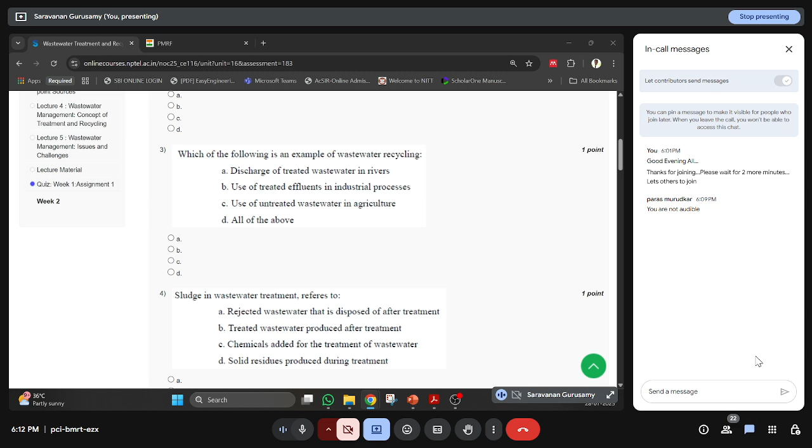Here you have a tab called Q&A, so if you go to Q&A, you will be directed to Google Groups. There also you can post some queries, and I will answer every 2 days once, so you can use that platform too.

Okay, so that's all about NPTEL and this course.

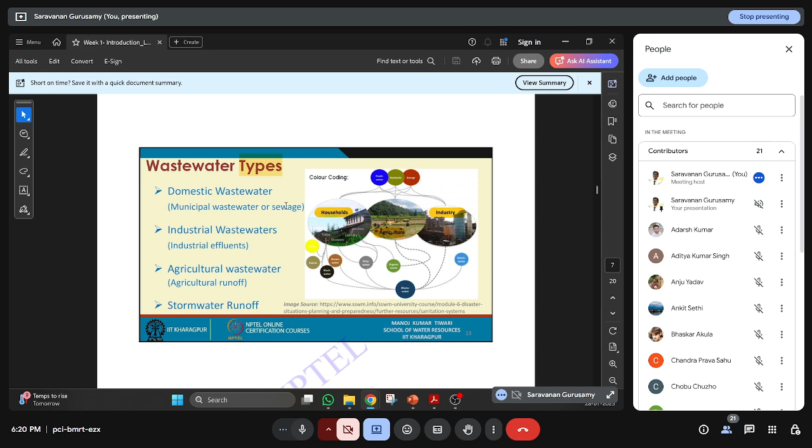So coming to the types, four major classifications, and the last one is runoff, which will not be wastewater. The other three are domestic wastewater, industrial wastewater, and agricultural wastewater. Domestic's other names are municipal or sewage - whatever sewers we have in front of our homes or institutes, the sewer lines in the roads, are called domestic wastewater sewers. Industry we call effluents, and agriculture we call runoff.

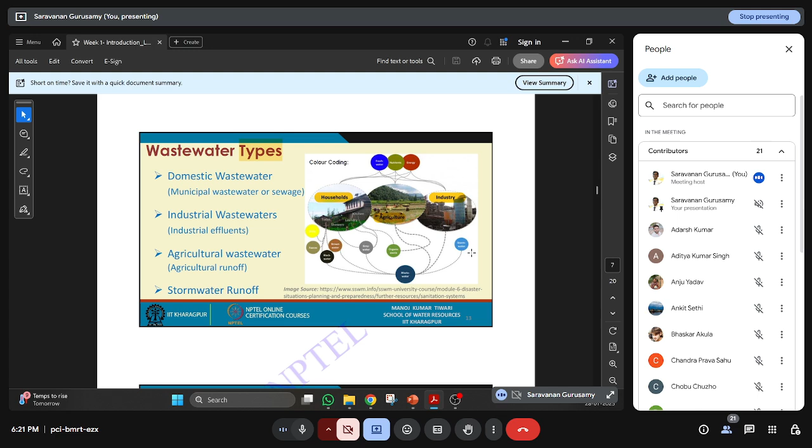This is the major classification, and we have a color code for each. Agriculture will have lots of organic load and nutrients coming out, so that's called green water. Storm runoff will be majorly pure water, so that's called light blue color code. Households will have lots of color codes that we are going to see here - if you think less pollutant to more pollutant, the color changes from light gray, heavy gray, brown water, to yellow water.

In the toilet, urine is called yellow water, and feces plus the toilet flush water are combinedly called brown water. So brown plus yellow will give you black water. This is totally the black water that comes out of the toilet, which will mostly have organic pollutant in it.

Other household contents like shower and bathroom taps won't have much pollutant, only soap washed with lots of water, so that is light gray water. Dishwasher and kitchen taps have some more organics, and washing machine wastewater, the flush water, also has some organics - that is called heavy gray water. So light gray water plus heavy gray water will give you the total gray water, while brown plus yellow commonly call black water.

That's a less polluted load. Okay, so this is the overview of color coding of our wastewater system.

Industry, if you see, all industry will use water in at least one process, so they will produce wastewater. And agricultural is another, third sector. First sector is domestic, second sector is industry, third sector is agricultural.

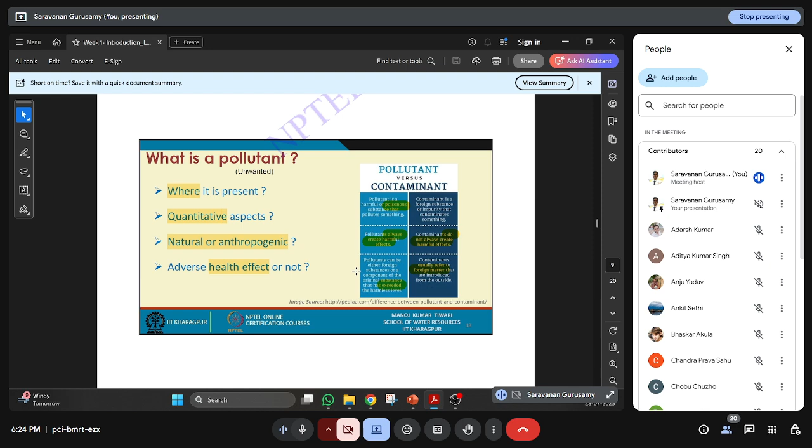So pollutants always create harmful effects. Contaminants do not always create harmful effects. The pollutants are contaminants that have exceeded the concentration. So that's the difference between pollution and contaminants.

So another classification for wastewater is wastewater sources: point source and non-point source. If you know where the wastewater is coming from, then it is a point source. If you don't know where the wastewater is coming from, then it is called a non-point source. So I have different sewer lines discharging wastewater into my lake or pond, then I know which pipe is discharging. So that is a point source.

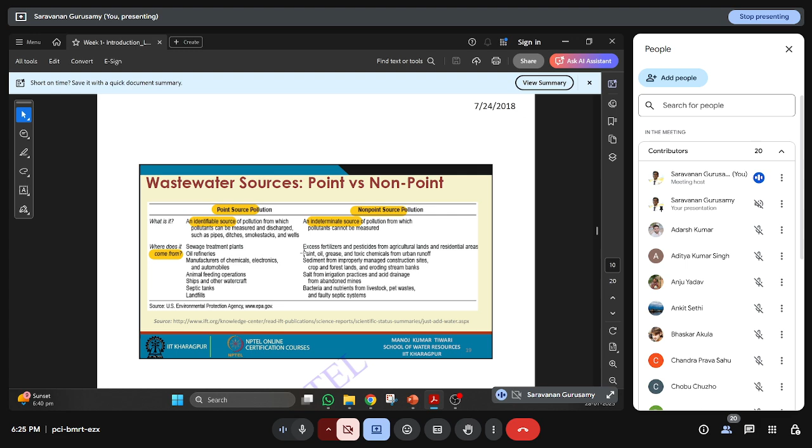So identifiable sources of pollution, like any sewer system, oil refineries, animal feeding operations, ship - because I know which ship is discharging - and septic tanks, landfills. So I can easily identify. What are the sources that are not identifiable? Like any excess fertilizer coming out of the agricultural field - I can't find which field is contributing to my wastewater. And like bacteria and nutrients in livestock, or any leak in the sewer lines, we can't find where it is. So those are all non-point sources of pollutants.

So if you see the difference between point source and non-point source, you can control the point source because you know where it is coming from. But non-point source is a diffuse source - it's coming from many diffuse sources. You can't control it easily. So you have easy control over point sources, it's a cumulative effect for non-point. Point sources can be easily monitored, but non-point sources are difficult to monitor.

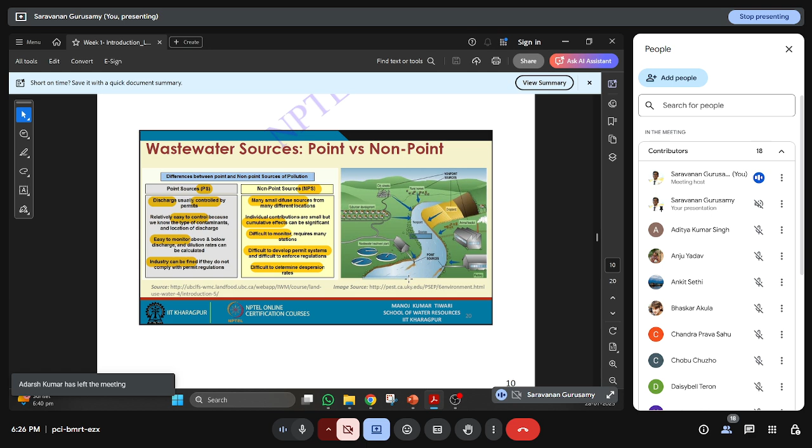And you can regulate some standards for this point source. If any industry is polluting, you can find the industry and have a regulation for that. But if you have a non-point source, you can't find which industry is contributing, so you can't give a regulation for that. And you can't find the dispersion rates. If it is a point source, you know how it is going to disperse - I am discharging my wastewater here, so I know how much is going to come here, I can model it through modeling of wastewater. But if it is non-point source, I don't know where it is coming from, so I can't model how much is going to come here.

So that is the problem with the dispersion. Dispersion is how much it is going to reduce or increase along the course of water.

If you see the diagram, a cropland is a non-point source. We don't know which agricultural field is contributing. Like that, if you see the wastewater treatment plant, I know it is going to discharge here. You can easily find it with the color change itself. So that's a point source. And a factory, that is also a point source.

Sir, for the non-point source, how can we find the capacity of STP point? Can we find out if there is any method to find out what amount of capacity is required by non-point sources? No, you are not talking about the STPs that are collecting the wastewater. We are talking about the STP effluent that is discharged into the river or lake.

Non-point sources are these open drains. How can we define that? That would be non-point sources. From the STP, the disposal point will be a single pipeline, but the sewer which is running in an open drain, that would be a non-point source. The drain that is discharging into the pond, that is a non-point source. But the treated effluent coming from the STP is a point source.

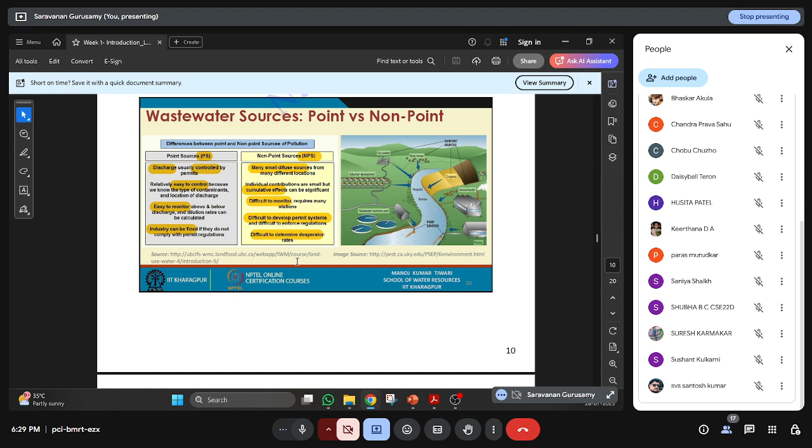So we are treating only the sewage that is collected in the drains. We are not treating the storm water that is collected. This is the difference. So drain will be a common term, but sewer lines are different - drains and sewer lines. Thank you for the question.

So you can see the examples of point source. You can identify with the color code itself. An industry is discharging here, so I can find the industry because it is discharging. Here I can find which pipe is discharging what nutrient, or I can easily collect here and measure. You are exceeding my standard, you should not discharge. So that is the standard for each industry.

In Tamil Nadu, we are adopting zero liquid discharge. No industry should discharge any liquid out of their premises. So if you are using 100 liters per day, you should not have even 1 ml going out of the industry. You have to treat on your own, only to the prescribed standard or zero liquid discharge. So they have to reuse it on their own.

We are only supplying the fresh water, we are not taking out the effluent to treat. So all industries are now following ZLD in Tamil Nadu, and many other states are following the zero liquid discharge system too. We are not allowing them to discharge even 1 ml out of the industry. So that kind of system is also there.

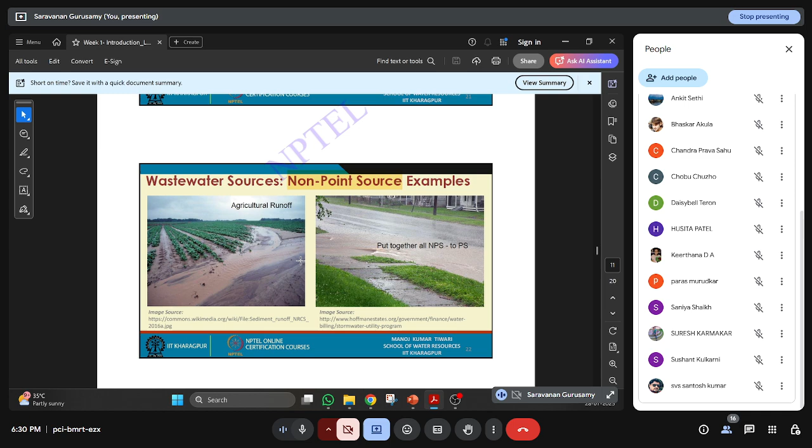If you see a non-point source, as mentioned, this is our drain, rainwater running out of the drains - that is considered a non-point source. Agricultural runoff is also considered a non-point source. If you put together all the non-point sources and collect them in a drain discharging into a single point, then we can convert the non-point source into a point source. That is one criteria you can follow. So that is the difference between a point source and a non-point source.

So why do we need to manage this wastewater and why do we need to treat it? Because if you discharge sewage or wastewater directly into a pond, river, or any water system, it will have severe consequences. First, human health will get affected. Second, the environment will get affected. Third, the economy will get affected. These are the three major reasons we have to treat and manage our wastewater.

First, health effects - what will it cause? If you directly discharge your wastewater, water-related diseases may originate, like cholera, dengue, diarrhea - these are all waterborne diseases.

So that will again increase in your area, so you have to treat it.

In 2012, statistics show around 8.5 lakh deaths happened in middle and low income countries due to contaminated drinking water, because we get drinking water from river sources. If you pollute the river, your drinking water is contaminated, and you will get waterborne diseases.

If you see the risk, unimproved sanitation will have high risk. If you have community sanitation or sewer connection, you will have low risk. That is the risk category you can use to categorize wastewater treatment management systems, and this is about health.

What about the environment? If you discharge untreated wastewater, the receiving body, that is a river or any lake, will have a huge amount of its water resources already contaminated. If you think about the statistics in India, most rivers like Ganga and Yamuna, most of our perennial rivers are already polluted with industrial discharges.

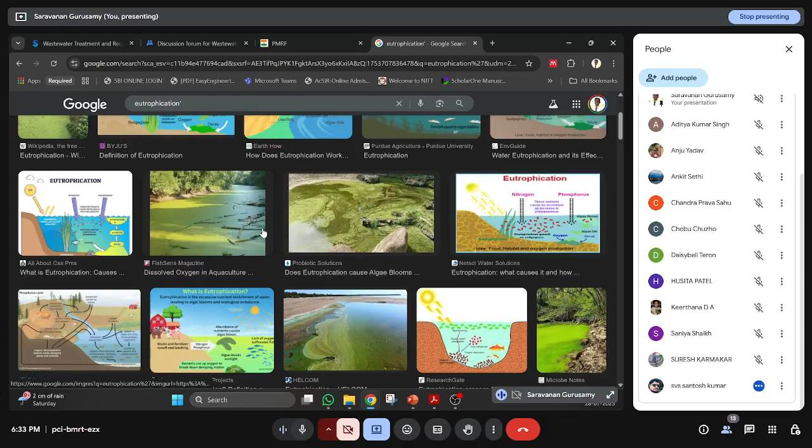I can show you images for eutrophication. If you see some of the figures, you can understand. Yeah, this is the kind of thing. How can we treat such a concept?

The only thing is you can't treat it, you have to stop the discharge, and naturally it has to regain itself. There is a process called natural regeneration of water bodies, but that will take time.

If it is a continuous flow system like a river, that can easily replenish. But these are all stagnant water bodies like a pond or a lake, so that will take a lot of time to replenish. So, is there any process to rectify these things?

If you have a collection system, and you are having sewage that contains nitrogen, phosphorus, potash, you can treat it. But if you have a pond that is containing wastewater, you have to first cut off the source, and then it will automatically replenish in a year's rainfall. It will easily replenish. If you don't have the source, algae will die because it's not having any nutrient.

So there will be no growth of algae, and it will easily die. So you can easily get the oxygen back. That's it. So the main problem is you should not discharge the wastewater into the source, you have to treat the wastewater.

So the third one is economic impact. The first one we discussed was the health impact. The second one is about the ecosystem. The third one is about the economic impact.

All the tourism or major parts of our economy are based on water bodies. We have fisheries, we have tourism, we have a transport system based on ships and so on. All of this will get affected if the water is polluted, so that is an obstacle to economic development.

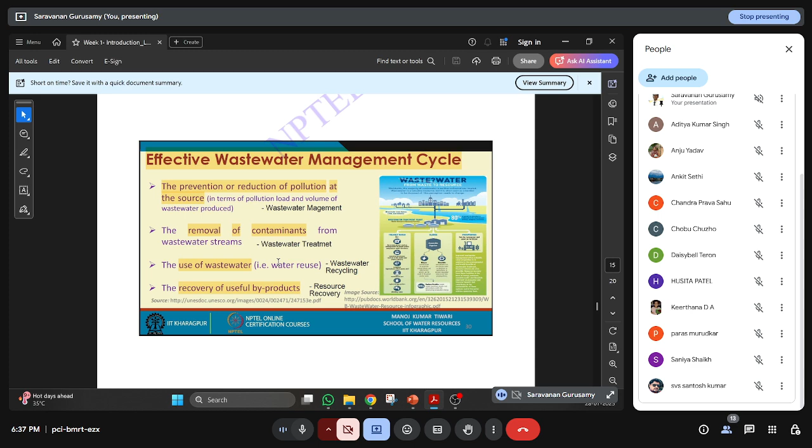If you think about it from a recycling perspective, wastewater contains a water source, a nutrient source, and an energy content, because you can generate energy from wastewater by anaerobic digestion. You can get methane, generate biogas, or do incineration. Organic matter is present there too.

If you discharge wastewater into wetlands - you know about wetlands, I guess - wetlands are natural ecosystems that can treat wastewater. You can simply discharge wastewater into the wetlands, so the carbon and nitrogen will be taken care of by the plants present there. It can treat the water and discharge pure water into the water bodies.

So lots of wetlands are there. There is a Wetland Conservation Act in India, a World Wetland Day, and some Ramsar sites in India. Recently, about 6 months back, two more wetlands were introduced as Ramsar sites in Tamil Nadu. You can search for Ramsar sites on Google and find lots of information about that.

So you can see the Ramsar convention, and you can see how many wetlands are there in India and their locations. That will give you a broad idea on how to approach this.

These are all wetlands. So you can see - if you discharge wastewater, the roots and plants can absorb the carbon and nitrogen present in the wastewater, and it will give you fresh water. That is about organic matter extraction, and other byproducts we can also get.

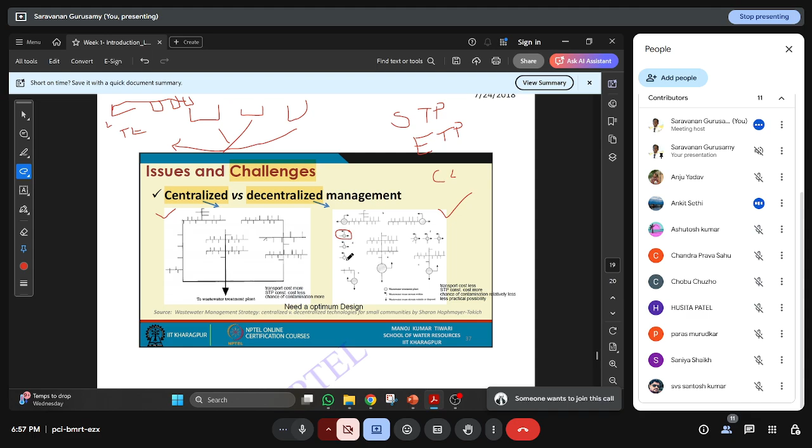When we talk about STP versus ETP - STP is sewage treatment plant - we usually say the reuse of STP can be used for horticulture purpose or toilet flushing. So what I'm talking about is the reuse of the treated water, the water which is used for flushing purpose. But in case of ETPs, they say...

Sir, your voice is not clear. Only to me or to everyone? Sir, I couldn't get you. Not clear, yeah sir, please. Can you repeat please? Yeah sure, I'm audible now. Yeah please.

I was saying that the output of STP can be used for horticulture purpose or toilet flushing, right? But some ETPs use soaps and detergents for treating - and I got your question. Maybe you're asking how we can reuse the treated effluent from industries.

As far as Tamil Nadu is concerned, we have zero liquid discharge. So all industries, after any treatment technology, use multiple effect evaporators. I think we have this in the course. That will evaporate the treated effluent so that we get only the salt or the residue - all the water will be evaporated.

That's the technology we use - we can't rely on discharge, and it also has energy production because the steam we produce can be used for energy production, and the recovered salt - because any industry will have only one pollutant, unlike sewage. So industries have only one type of pollutant that can be easily recovered and used in their own system. Many industries use multiple effect evaporators, MEEs. So they're not discharging anywhere, nor are they reusing it elsewhere.

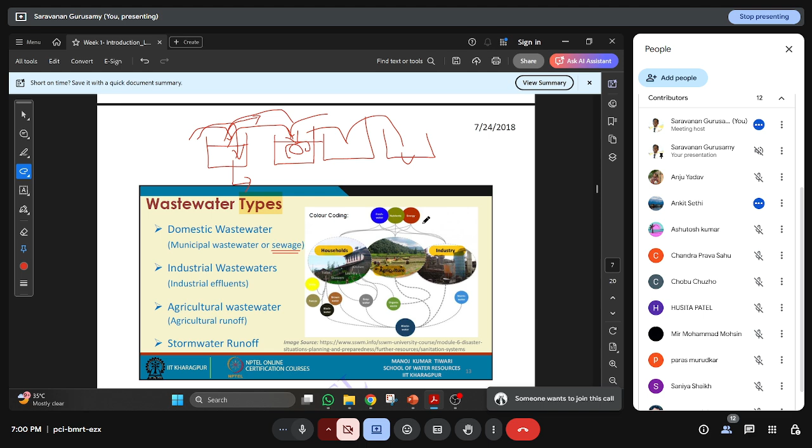Any mining industry or metal smelting industry has only one type of metal that can be recovered and used for their product. Okay thanks - that cannot be reused until it is not organic, you can't discharge it anywhere. So that's the broad idea we can take. Okay, thank you.

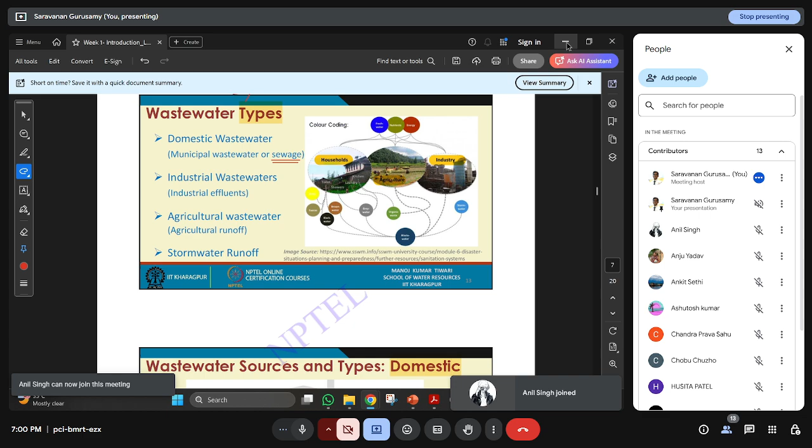So first question: what is wastewater recycling? A) Treating wastewater for removal of contaminants, B) Recovering beneficial nutrients or metals from wastewater, C) Reclaiming water from wastewater and putting it to beneficial reuse, D) All the above. You can post ABCD in the chat box. Treating wastewater for removal of contaminant is not recycling, right? I'm not asking about wastewater treatment, I'm asking about wastewater recycling. So how would it be? Recovering beneficial nutrients or metals, reclaiming water from wastewater and putting it to beneficial reuse - that may be correct, I guess, right?

How come it will be B? Because recovering beneficial nutrients is treatment technology only, it's not recycling. Recycling means we have to think about the 99% water, the recovered water - that is reclaiming water from wastewater, that is the 99% of water. Let me take the pen.

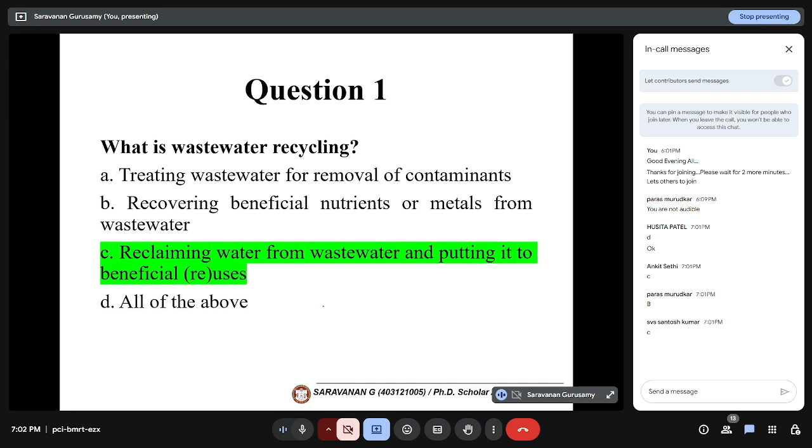So reclaiming wastewater and putting it to beneficial reuse is called wastewater recycling. The question may be tricky, but simply if you read it, you will get the answer. Wastewater recycling is reusing treated water, reclaimed water, for beneficiary purposes.

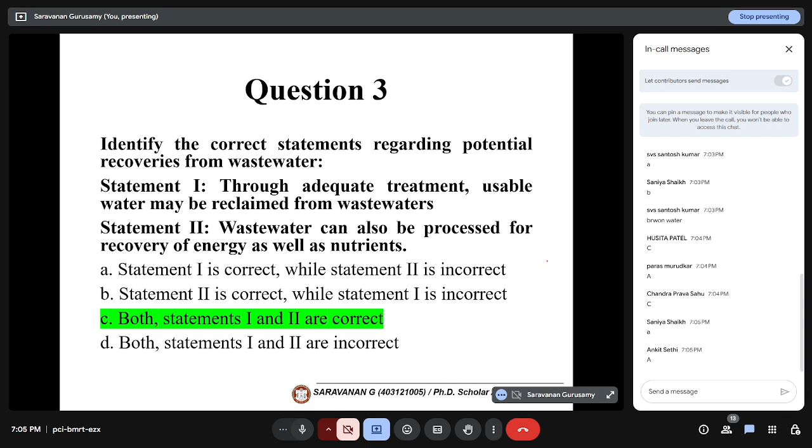Why are you thinking the second statement is not correct? Think here - in a recycling perspective, resources can be recovered. Water, nutrient, energy, organic matter, or anything can be recovered as a byproduct. So the second statement is correct - wastewater can be processed to recover energy as well as nutrient. You got it? Okay, please correct it.

So fourth question - hope you are coming with me, or can I go some more slow? Is it fine? We have 30 questions in this.

If you think about a non-point pollution source - what is it? A source with negligible amount of pollution, a set of several small sources from many different locations, a source of pollution that was there in the past but no longer exists, or a hidden source of pollution which cannot be identified. I think non-point source will have only one keyword - non-identifiable. Option D may be correct.

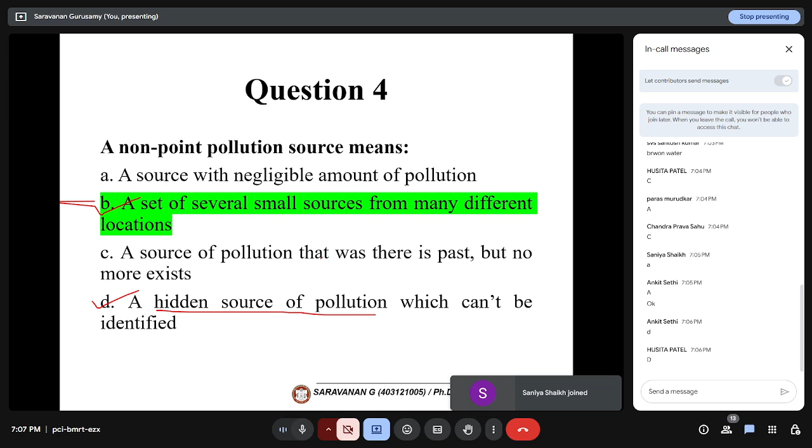Right? A set of several small sources from many locations, and a hidden source of pollution which cannot be identified - small source from many different locations is also correct, that cannot be a hidden source of pollution. Both seem correct, let me check the key. Both seem correct because it has the keyword non-identifiable source, and also many diffuse sources from many different locations are correct. Let me check the key - B also correct, D also correct.

We will work on the fifth question, I will answer this in the next week. Which of the following is an example of point source? They are asking about the example: discharge of industrial effluent, discharge from STP, spill from oil refinery, or all the above.

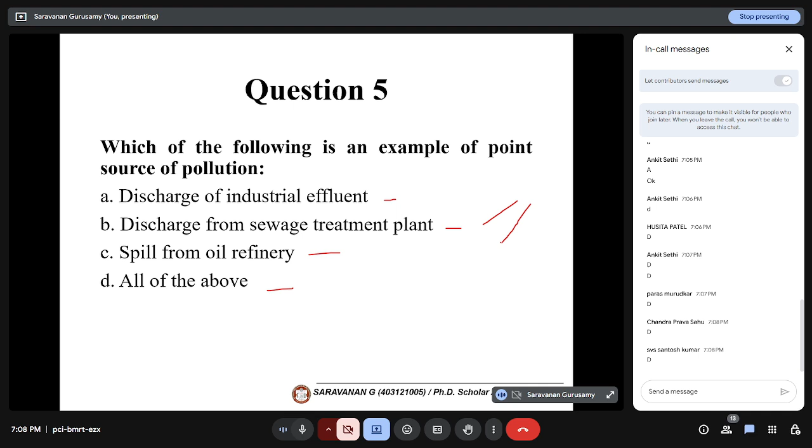Which of the following is an example of point source of pollution? So STP, you can find where it is coming from. Industry also you can find where it is coming from, and oil refinery spill also you can identify. So all the above is correct - the point sources are oil refinery, sewage treatment plant, STP, and industry effluent.

Manufacturing industries. Identify the non-point source of pollution among the following: urban and agricultural runoff, spill from oil refineries, discharge from ETPs and STPs, or all the above.

Wherever you can see the word runoff, you can say it is a non-point source, because until it is collected in a single drain and discharged into a single point, otherwise it is called a non-point source. So spill from oil refinery is a point source, ETP and STP discharges are point source. So answer is A.

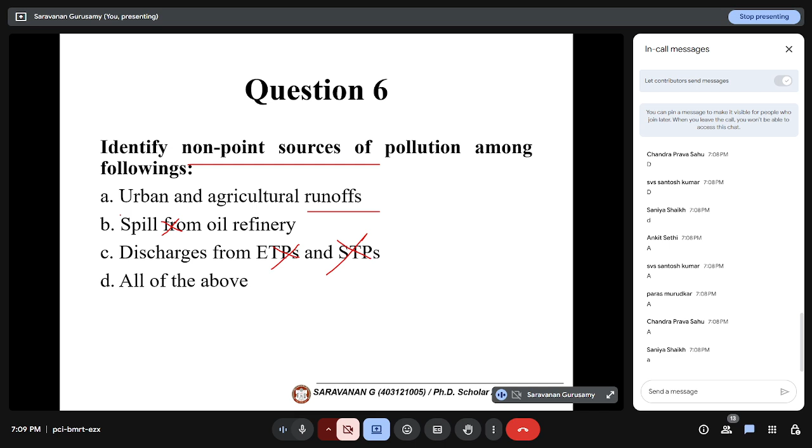Yeah, so you can see here, runoff, agricultural land, excess water.

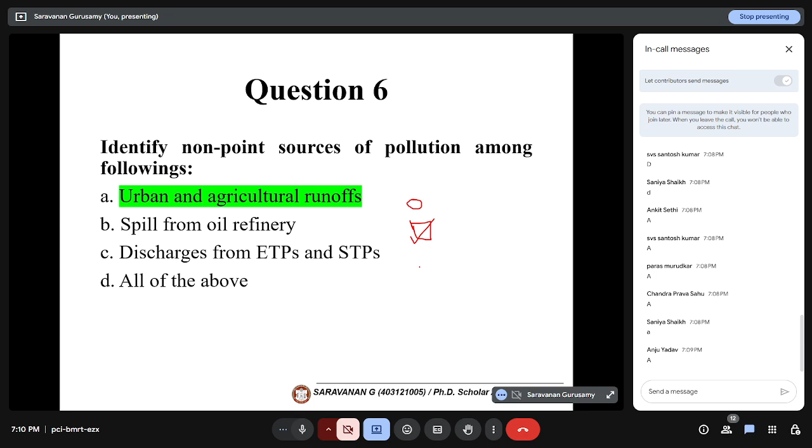So seventh question again: which is the correct statement regarding waterborne diseases with poor wastewater management? Waterborne diseases are common in regions with poor wastewater management - is that correct or not? Then, direct consumption of wastewater is the major reason for the spread of waterborne diseases in such areas.

No, read the first line: the correct statement regarding the linkage of poor wastewater management. So waterborne diseases are common in regions with poor waste management is correct. Nobody is consuming wastewater directly, right? It is about consumption of treated or partially treated water, not untreated wastewater directly. You can say it is consumption of water taken from the discharge point of wastewater, or the source may be a river or a lake that is contaminated with wastewater. We are not directly consuming wastewater. So the second statement is wrong.

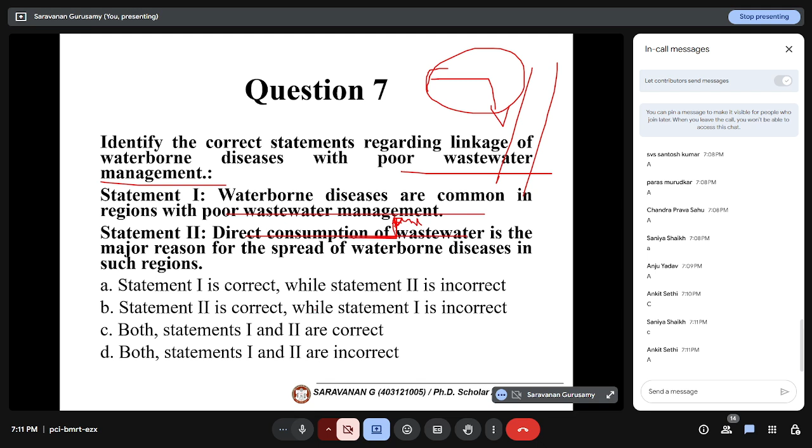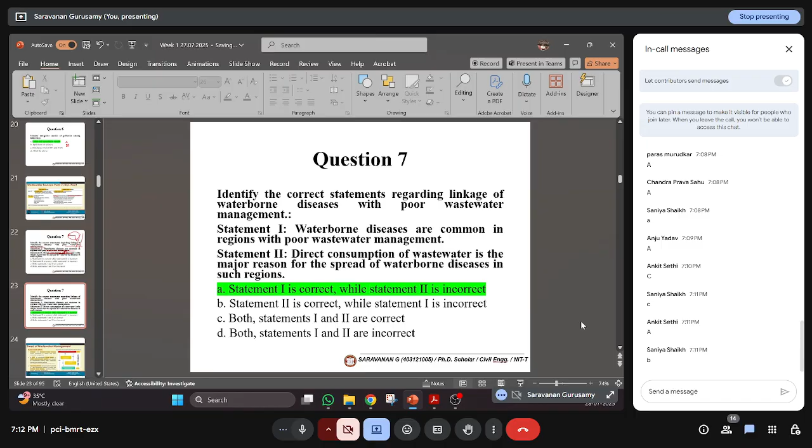Wait, I have chosen wrong. First is correct, second is wrong. Please correct it. So the answer: first is correct. Waterborne disease is common in regions with poor waste management. Direct consumption of wastewater is not the reason, it's not direct consumption - nobody will consume wastewater directly, right? But the statement is correct: if you consume directly, it would spread waterborne disease, but nobody consumes it directly.

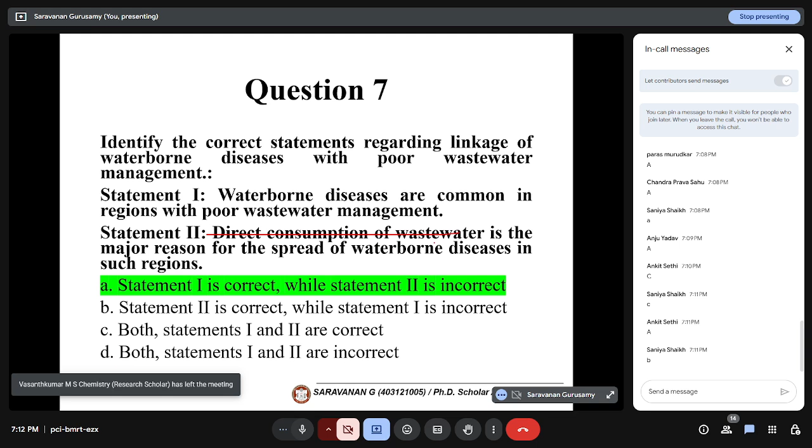Here you can see the health effects of wastewater management. The waterborne diseases can be eliminated if you treat or increase sanitation, you will eliminate many waterborne diseases. Wastewater related diseases remain widespread in regions with poor waste management systems, in low or middle income countries, caused by contaminated drinking water. It's not about direct consumption of wastewater, it's contaminated drinking water.

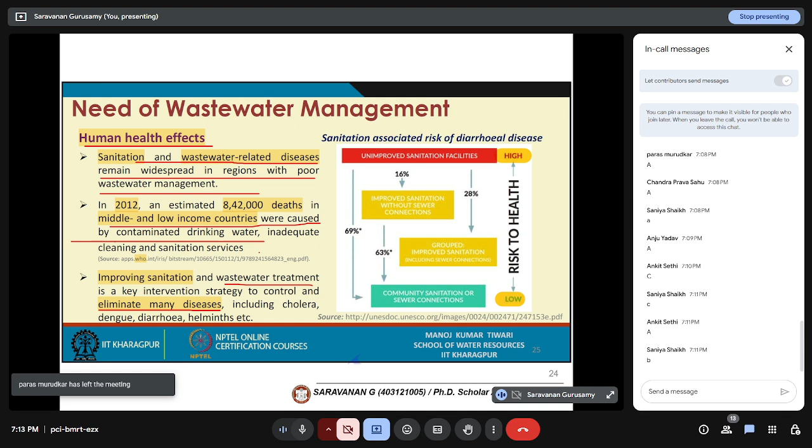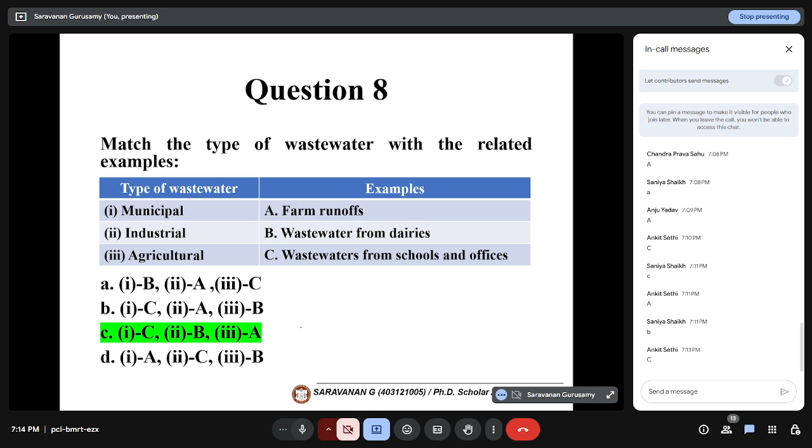So can you match the type of wastewater with the examples? Municipal, industrial and agricultural - farm runoff, wastewater from dairies, wastewater from schools and offices. In municipal itself we have two categories: one is household, another is commercial or institutional. Commercial will be from marketplaces, offices, institutions like schools, colleges. Household will be from kitchen, toilets, garden - these are household wastewaters. So if you match here, municipal will be C, industrial will be dairy, agricultural will be farm runoffs. So 3A, 2B, 1C will be correct. Yes, C is correct. So this is the type of wastewater: domestic wastewater, industrial and agricultural runoff.

First, why is it called grey water and not black water? Because it has less organics. So the answer is grey water has less pollution load. That's why most people's answer is C. Grey water has less pollution load, and that's why most people are reusing it directly without any treatment.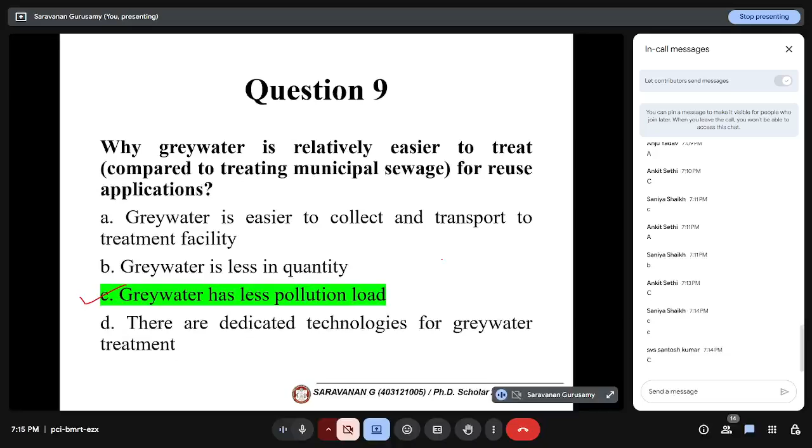But black water or brown water cannot be reused without treatment. Grey water can be reused without treatment because it has less pollution. You can directly discharge it in gardens. Some soap-consuming plants are there, so that kind of plant you can adopt for detergents used in wastewater. Light grey water doesn't have much load, so you can simply redirect it to flushing without much treatment. So the answer is it has less pollution load, that's what I have mentioned here.

Often in centralized wastewater management system, what is centralized waste management? Several smaller size treatment facilities are needed, long distance transport of wastewater is required, quality control is difficult, all of the above.

If you have a large number of STPs for small areas, there is difficulty in quality control because this may discharge at some quality, that may discharge at some quality. But if you have one STP, you have only one effluent point, so you can easily control the quality. Quality control is easier in centralized systems; in decentralized, quality control is difficult. So that option is wrong. Several small size treatment facilities are required for decentralized, not centralized, so that is also wrong. So option B is correct.

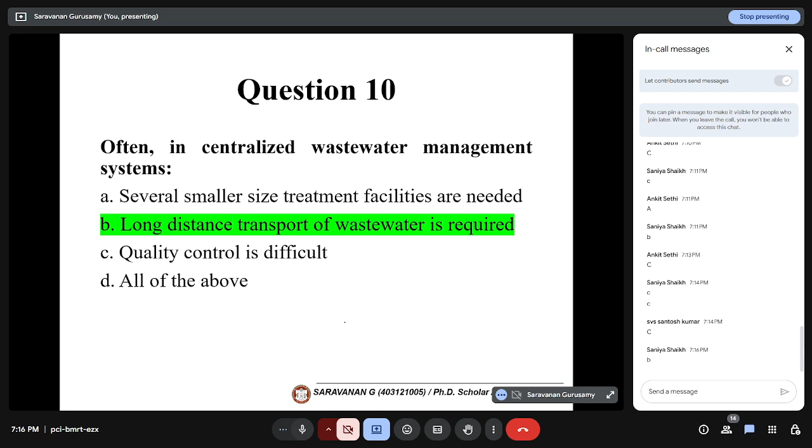In centralized systems, long distance transport of wastewater is required because whenever wastewater is created, it needs to travel a long distance. So option B is correct, that's what we have discussed. Transport cost is more, and there may be some contamination during transportation.

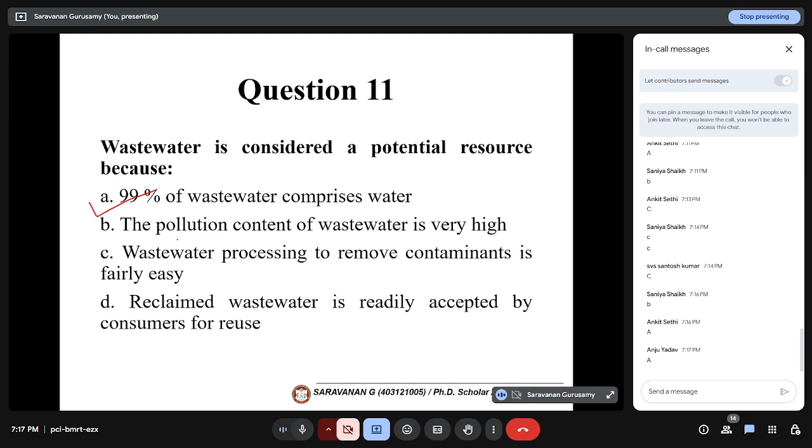11th question: wastewater is considered a potential reuse resource because - is it because 99% of wastewater comprises water, the pollution content is very high, processing to remove contaminants is fairly easy, or reclaimed wastewater is readily accepted by consumers for reuse? Why is wastewater considered a resource? Because it contains 99% water. Yeah, that's correct, that's what we had seen - 99% water, only 1%, less than 1%, is pollution.

Which of the following is not a non-point source? Sediment overflow from eroding stream banks, large sanitary landfills, nutrient from livestock and pet waste, irrigation runoff from agricultural land. Runoff is surely a non-point source, so that is correct only. Then large sediment overflow from eroding stream banks - that is also something we can't pinpoint where the sediments are coming from, so that is also a non-point source.

They are asking which is not a non-point source, please read the question carefully. Nutrient from livestock and pet waste - that's like livestock, those who have cattle in their home or garden, lots of cattle will be in many gardens, so we don't know which cattle farm or livestock is generating the nutrient. So that is also a non-point source. But a large sanitary landfill, we know the wastewater is coming from that same landfill, so it's a point source. Landfill is a point source.

So which of the following is correct for domestic wastewater? We have 4 categories: domestic, industrial, agricultural, and stormwater. The first 3 are considered wastewater, the fourth is directly a water resource. Domestic wastewater contains gray plus black, or gray plus brown, or brown plus urine, or gray plus black - we have grey water, we have yellow water plus brown water, both yellow plus brown combine as black water, and this is grey. So grey plus black combine as domestic. Domestic is grey plus black, A is correct, that's the total domestic.

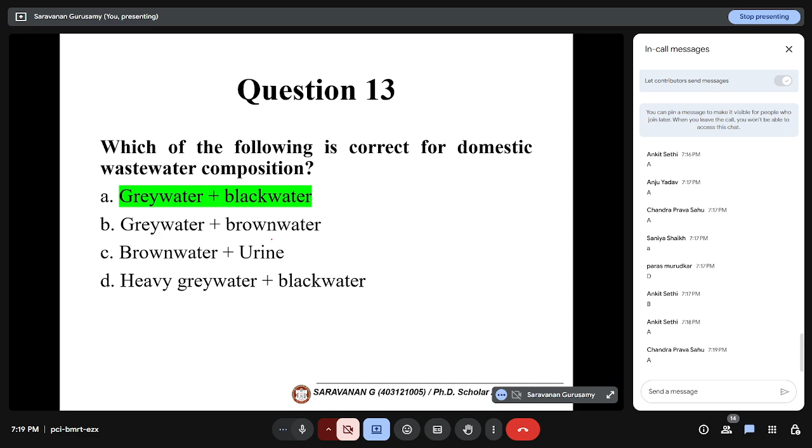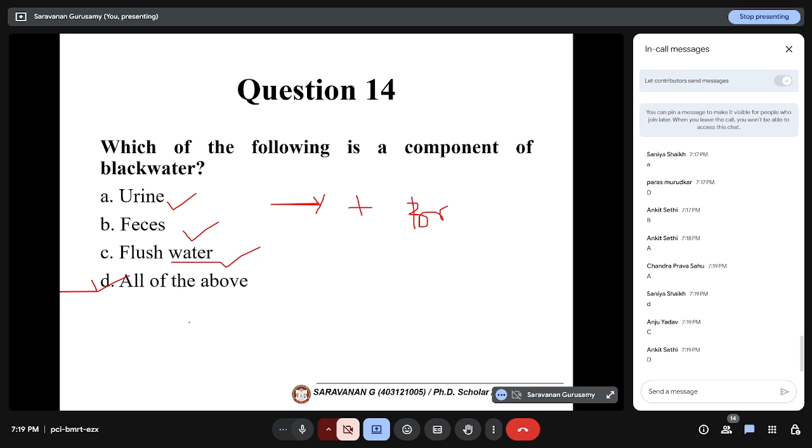Okay, grey plus black. Which of the following is a component of black water? Black water contains yellow plus brown - yellow is urine, brown is feces, and flush water from the toilets. So is it all of the above? No, which is a component - not C, D is correct.

Identify the correct statement concerning pollutants and contaminants: they may or may not create harmful effects.

Pollutants are foreign matter typically introduced from outside. Contaminant may or may not create harmful effects. Contaminants are either harmful or poisonous in nature.

Actually, pollutants are either harmful or poisonous. Contaminant may or may not create harmful effects. Contaminants are the foreign matters. So the answer is, contaminant may or may not create harmful effects is correct. They are asking for the correct statement. This one says pollutant are either harmful, so D is not correct.

Let me go with the answer. C is correct, see here. Pollutants are poisonous, so this is wrong. Contaminants are foreign substances or impurities, so this is also wrong. Contaminant do not always create harmful effect, so this is correct. This is wrong, pollutants are toxic.

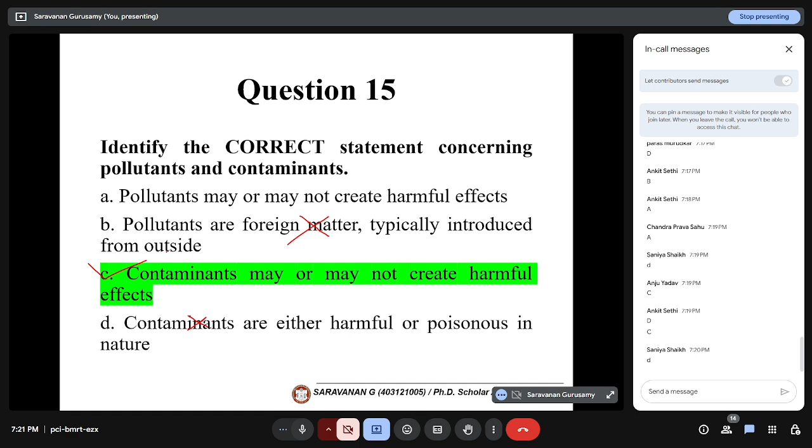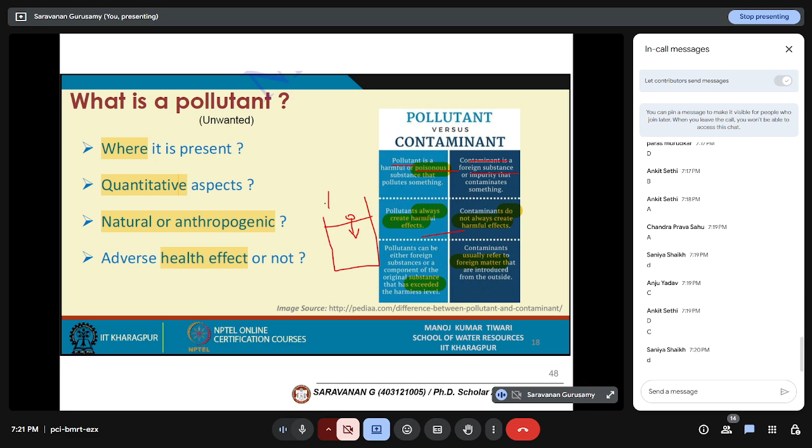Pollutants create harmful effects. That's why I said, please remember this: a glass of water contains a drop of oil. That is a contaminant because that is a foreign substance not required in water, not essential in the system. That is a contaminant. If you take blood, and it is contaminated with a microbe, that is a contaminant. But if it is causing an effect, then it is a pollutant. So, water having an oil drop is a contaminant, but it is not having any health effect. But if it is having a sewage drop, then it is a pollutant.

Moving to the 16th question: non-point sources of pollution are usually difficult to monitor and control. Why? Many small diffuse sources from different locations require several spatial distribution monitoring stations. Difficult to determine the dispersion rate of the pollutant flow rate. All the above.

Many diffuse sources is correct. Difficult to determine the dispersion rate, yeah that is also correct. Because if you know the exact source, say it's a river - I have industry 1 here, industry 2 here, discharging the effluent, and the water flow is here. I can model easily. The concentration is C1, the concentration is C2.

What is the concentration here? Can I take water from here? When will the concentration become negligible, where can I take the water? That I can easily model with natural system modeling, water system modeling. For a river, a lake, a pond, an estuary, I can easily model based on mathematical modeling or finite element analysis. But if it is a non-point source, I don't know where it is coming from. How can I model it? How can I find the dispersion rate?

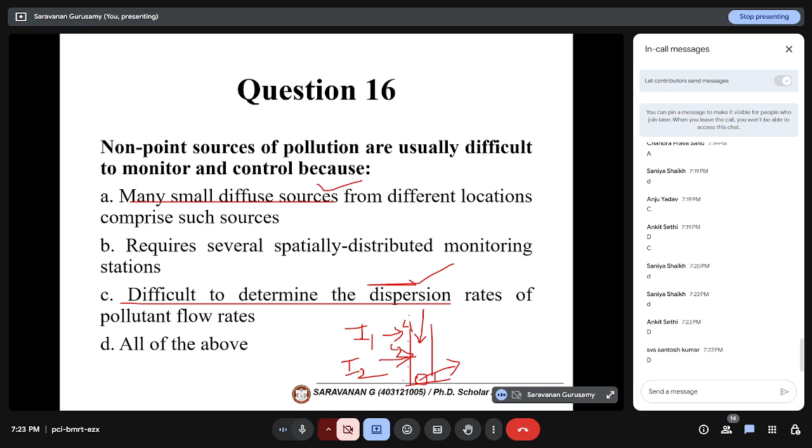So that is a difficult thing, and it requires several spatially-distributed monitoring stations. I have to set up different monitoring stations and identify how much concentration is in each station. Then I can model it, so it requires a several spatial system. That is also correct. So all the above is the answer for non-point source. Difficult to determine the dispersion rate, difficult to monitor - that's it, many diffuse sources.

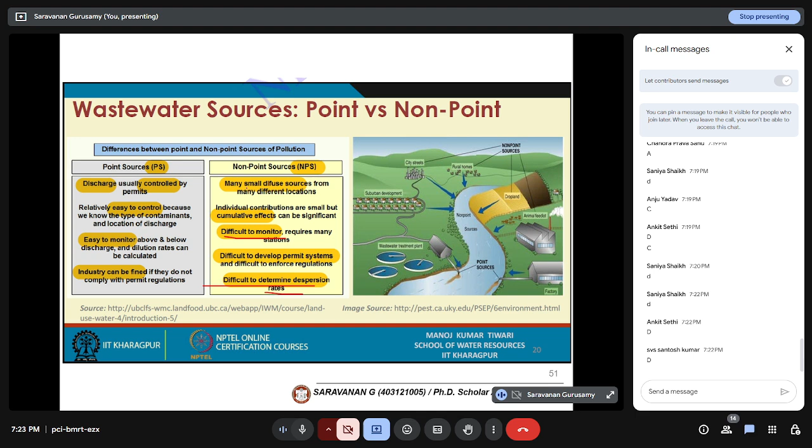Which of the following is not an ideal practice of wastewater recycling? That is, after treatment, how can we recycle it? Which is not an ideal practice, they are asking. So: use of treated domestic wastewater for horticulture; discharge of treated domestic sewage in agricultural field; use of treated industrial effluent in cooling towers; discharge of domestic sewage into irrigation channels.

Industries use treated water in their cooling towers - that is correct, they are doing that. Treated domestic water for horticulture is good, they are doing that. Discharge of treated domestic wastewater into agricultural field - we are also doing that, because that is one of the options. In US EPA...

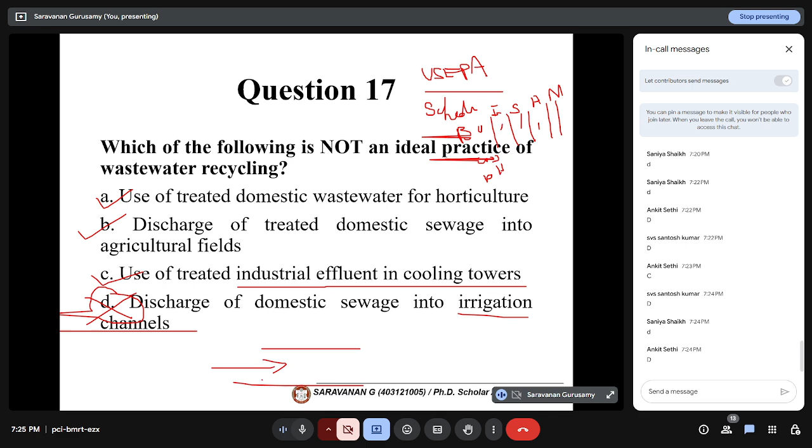US EPA guidelines for discharge of wastewater, in Schedule 6, there are 4 categories of discharge of wastewater: one is inland, one is sewer lines, one is agricultural field, one is marine discharge. So you think about how much BOD should be there, how much COD - these are all pollutants I am referring to - how much pH should be there. If it meets the standard, you can discharge in the inland. If it meets the standard, you can discharge in the sewer. If it meets the standard, you can discharge in the agricultural field. But you can't discharge in irrigation channels, because irrigation channels need to have pure water. So that option is something we are not doing anywhere. Irrigation channel is directly the channel that carries fresh water - you should not directly discharge into that.

Okay, I can show you the discharge standard guidelines. Let me take one second.

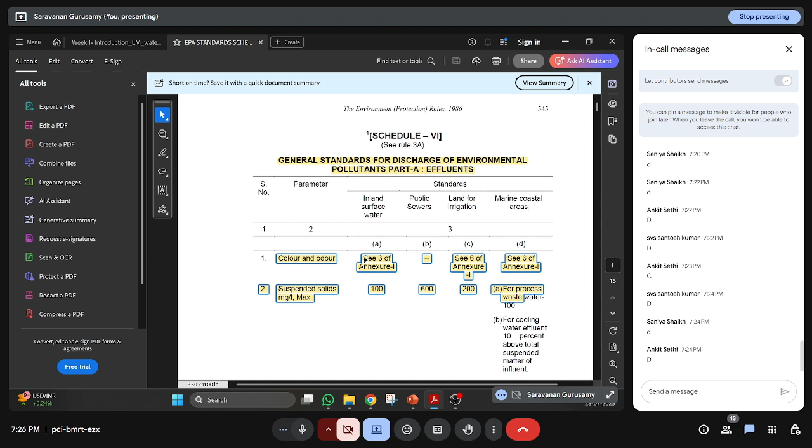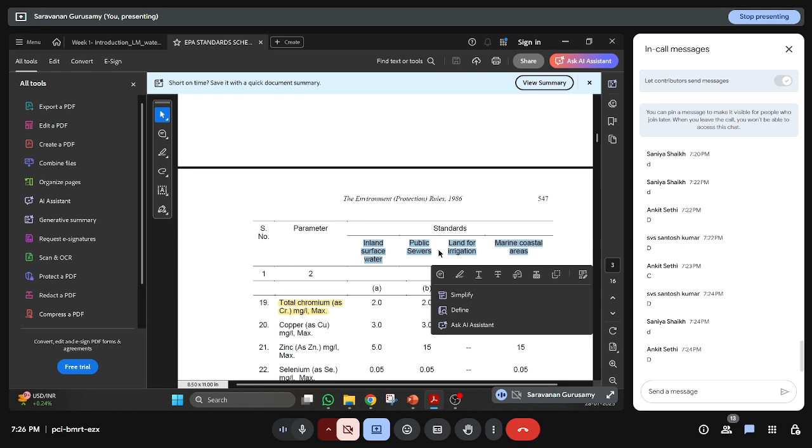EPA standard schedule 6 covers general standards for discharge of environmental pollutants or effluents. We have 4 categories: inland surface water, public sewers that collect water to the STPs, land for irrigation or agricultural land, and marine coastal areas. If you are directly discharging into the ocean or sea, how much should it be? Suspended solids should be 100, 600, 200 based on cooling towers and all. Temperature should be this, COD should be this, nitrogen should be this. All of these parameters are standardized for the 4 types of discharge. So these are all the basic discharge standards we are following for treated effluents from industries.

What is this EPA, sir? It's an Environmental Protection Agency. Sorry, this is the Environmental Protection Act of India. The US EPA is the Environmental Protection Agency, but EPA in India is the Environmental Protection Act. So this is the umbrella act.

We have lots of acts in India: Water Act, Air Act, solid waste management rules. But all of this comes under EPA, 1986. After EPA was introduced, it became the umbrella act for environmental law, so all these laws come under this EPA. I can have a small lecture on environmental laws later if time permits. I am also a student at National Law School of India University, doing a postgraduate diploma in environmental law, PGDEL. You can also search for it; it's offered at Delhi University and Bangalore Law University as environmental law courses.

This law was initiated when the Bhopal gas tragedy happened, after which they thought about the Air Act. Later, when the plague started, they thought about solid waste management. Whenever diseases started spreading, like cholera, they thought about the Water Act. So every act has a history. Later they had to think about the broad spectrum of environment, and the EPA Act came. So we have the Environmental Protection Act in India.

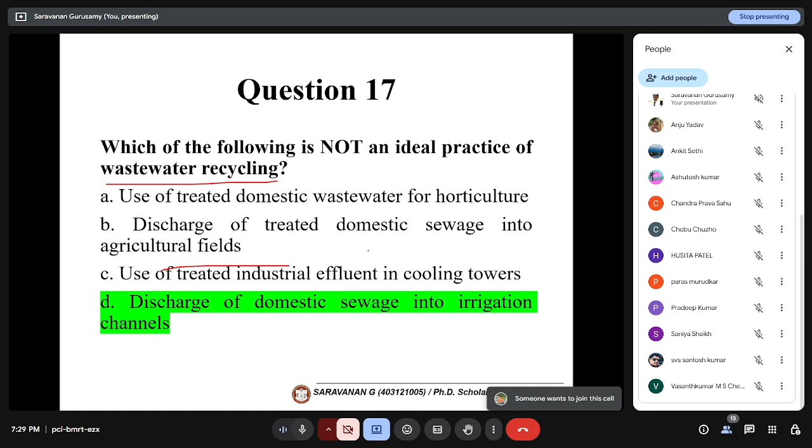Based on that, we have lots of standards and rules to be followed for industries, controlled by the Central Pollution Control Board, and each state has a state pollution control board. We have TNPCB, the Tamil Nadu Pollution Control Board, which reports directly to the Central Pollution Control Board based on discharge standards. Not only water, but air emission standards and water discharge standards, everything is under EPA. So they have discharge options for wastewater, as mentioned in Schedule 6. We can discharge into agricultural fields, inland surface waters, marine systems, or sewer lines, but not into irrigation channels. Hope it's clear.

Question 18: Degradation of natural aquatic ecosystem due to poor water management may lead to eutrophication, dead zones, both A and B, or putrefaction.

I forgot to tell you one thing: eutrophication and dead zones are one and the same. There are a lot of zones in the pond. Whenever there is a lack of DO, the lake or pond is considered a dead zone. So we draw a DO line - the DO starts at the saturated level. Whenever organic load or nutrients increase, DO starts reducing. After all the nutrients are consumed, the algae die. Then the atmosphere will replenish the DO, so it starts increasing again. This is the DO at any time t. So when the DO is very minimum or zero, that zone is considered a dead zone. We have an active zone, a dead zone, a replenishing zone, and again an active zone - these are all the zones of water bodies. So the dead zone is the one with the eutrophication condition, where the dissolved oxygen is fully zero or very minimum for aquatic life.

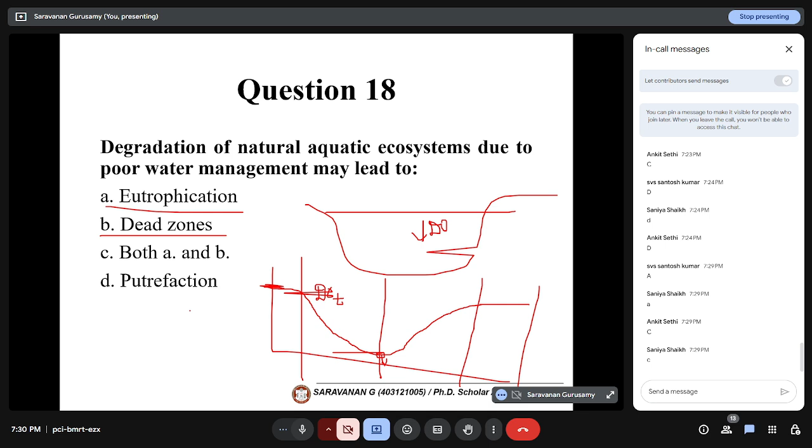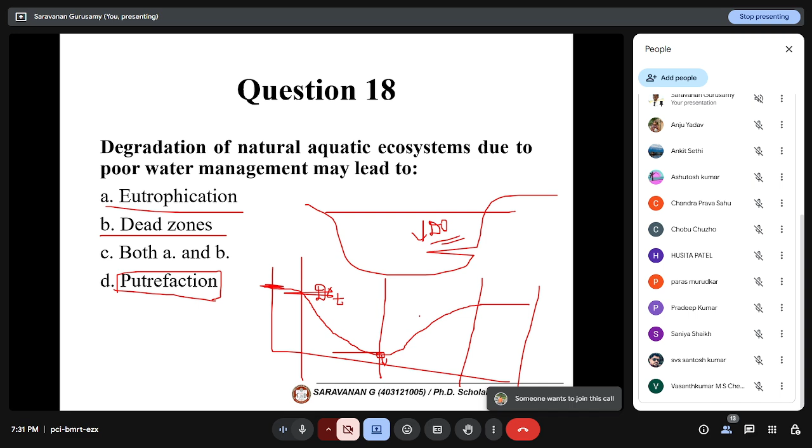What would be putrefaction, sir? I never heard this one. Sorry sir, what about option D? Putrefaction - what is this? Option D is putrefaction, which is the degradation of organic matter. If you put a banana peel in the dustbin, next day you will get a smell because of the degradation of organic matter - that is called putrefaction. In water systems too you will call it putrefaction, but that will not happen in any water bodies directly related to this. Eutrophication and dead zones are the problems from poor management in aquatic life, leading to degradation of the natural ecosystem. Whenever dissolved oxygen is nearly zero, it is called a dead zone. So options A and B are both correct - eutrophication and dead zones.

Excess nitrogen and phosphorus can lead to potentially toxic algal bloom. That's the green layer I mentioned, the algal bloom, and it declines biodiversity because all the fishes will die. All other organisms that require water, like underwater plants, will die. So that's the decline in biodiversity.

Which of the following central government scheme is aimed at attaining nationwide cleanliness and hygiene? We have lots of schemes. One is based on cleanliness, hygiene or sanitation. Swachh Bharat Abhiyan is the propaganda, and Swachh Bharat Mission is the whole mission. So you can say SBM and SBA are one and the same. SBA, Swachh Bharat Abhiyan or Swachh Bharat Mission, is the scheme given by the government for cleanliness and hygiene in India.

Yeah, it was started in 2014.

Can't we consider Namami Ganga also in this? It was also for the cleanliness and hygiene of rivers, sir. Have we considered that also? What is the C option, sir? The C option is Namami Ganga. That I have to read, I don't know anything about that, I have to read, sir. Maybe I will tell you next week. It was for the rivers, yeah, but they are asking about cleanliness and hygiene as a whole. Maybe if you are thinking about rivers, Namami Ganga may be correct. That I will read and tell you next week. I don't have any idea on that.

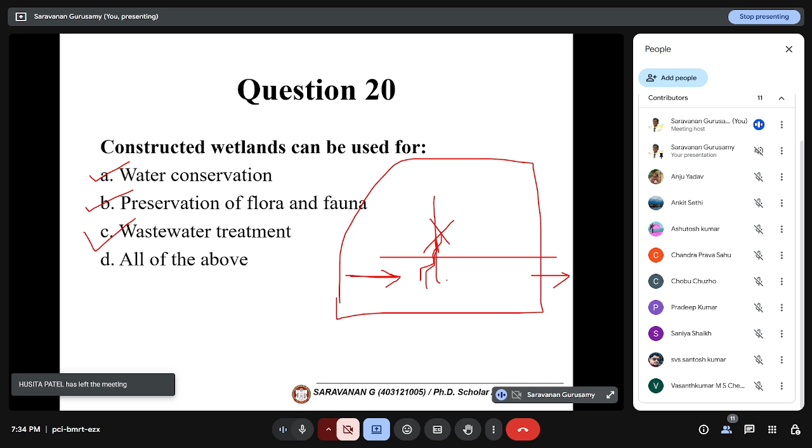It's a good place for flora and fauna. Vedanthangal and other bird sanctuaries are based on wetlands, coming in Tamil Nadu and elsewhere. Lots of wetlands are there around the nation, and that's a place where biodiversity is very rich. You can find all types of plants and aquatic organisms, as well as birds and animals, so it's a place for preservation of flora and fauna. Also it's a treatment system, and we can conserve wastewater because it increases the water table. So water conservation is one point - all of the above is correct.

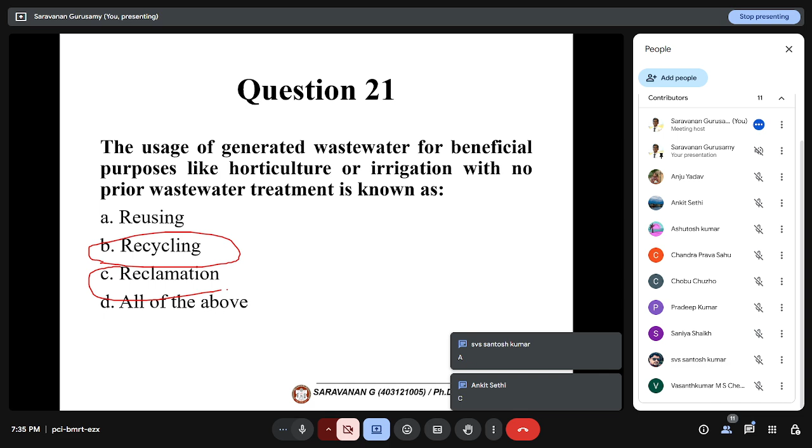Usage of generated wastewater for beneficial purposes like horticulture or irrigation with no prior wastewater treatment - without any treatment we are using the wastewater for horticulture and irrigation - is it called reusing, recycling, or reclamation? Recycling is after treatment we are using it. Reclamation is we are reclaiming something from the wastewater. But if you are directly using it, that is called reuse. As I mentioned, your bathroom or shower tap water, not toilet flush, can be directly connected to gardens for horticulture or irrigation, since it has less organic load. So that is called reusing, without any treatment.

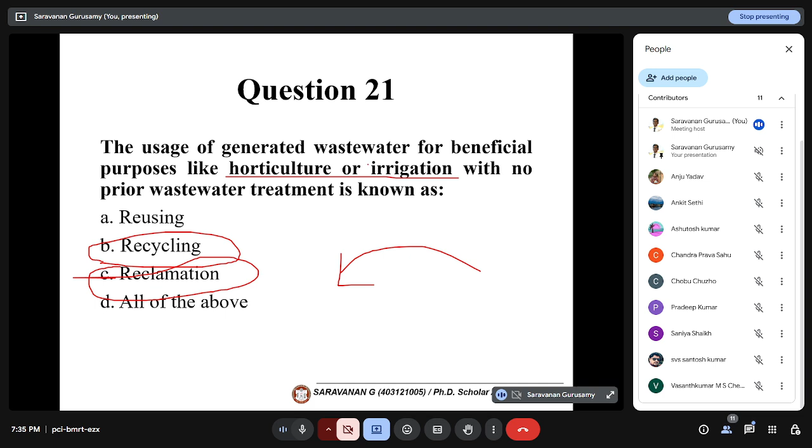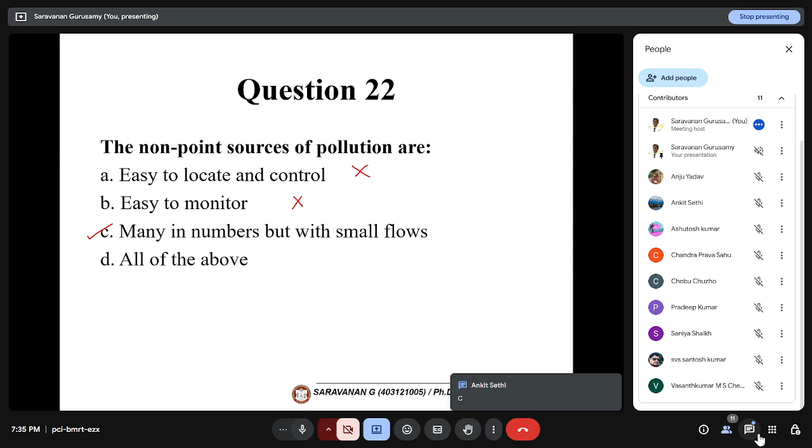Are non-point source pollutions easy to locate and control, easy to monitor, many in number but with small flows, or all of the above? It's not easy to locate, not easy to monitor, but it's correct that they are many in number but with small flows.

Many questions will be repeating because I have taken them from the last 3 years, but I have presented them in different forms, so it will be slightly confusing, but mostly it will be the core concept.

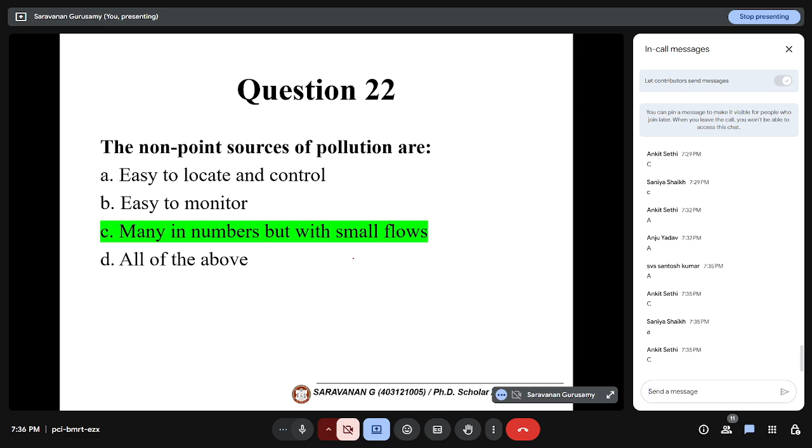Select the odd one among the following: domestic wastewater, municipal wastewater, stormwater, and sewage.

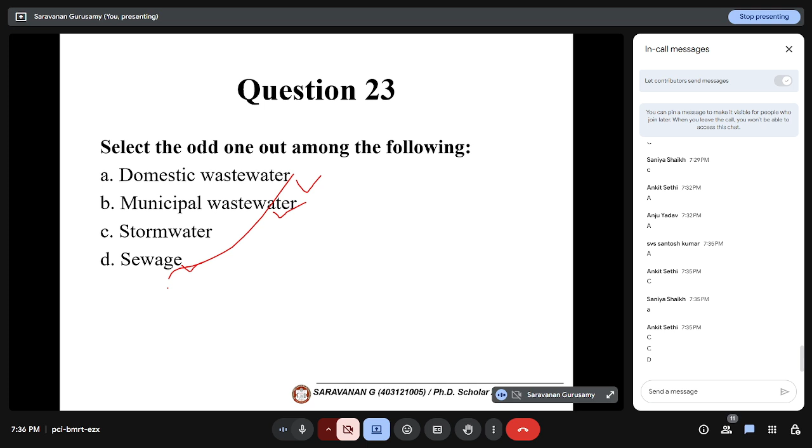I think three of these are the same meaning: domestic wastewater, municipal solid waste... I am sorry, municipal wastewater, and sewage - all three are one and the same. Stormwater is different; it is the other type of wastewater.

Which of the following statements is true regarding the different types of wastewater? Generally, industrial effluent are lesser polluted than municipal sewage - is that correct? No, industrial effluent are highly polluted. Water from agricultural sector is usually low in organic matter - no, because organic agricultural wastewater are green in color, and that color coding is given because it has lots of organics. Water from toilets is high in chemical content but has a relatively low concentration of pathogens - that is also wrong. Then what is correct?

Okay, they are asking: industrial effluents are lesser polluted - that statement about different types of wastewater, agricultural sector having low organic matter, water from toilets being highly... this is wrong, industrial effluent being lesser polluted is also wrong. Water from agricultural sector is usually low in organic matter - correct, because agricultural sector will have less organic matter compared to domestic wastewater, and agricultural wastewater will have more nutrients, sediments, and agrochemicals.

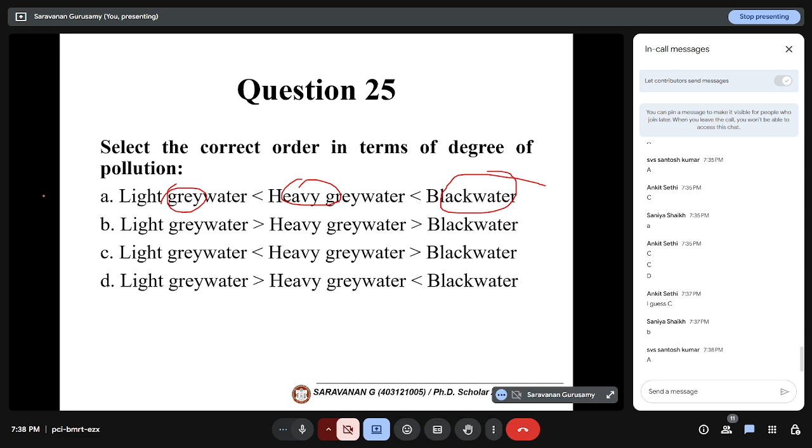Select the non-point source of pollution among the following. Can you select industrial effluent outlets? That's the point source. Pollutant deposited through atmospheric deposition - we can't find where it is coming from, so that is a non-point source. Toxic chemicals from urban runoff - runoff is surely non-point source. Discharge from oil refineries - oil refineries are known, where it's coming from, so it's a point source. Landfill is a point source. Discharge from STPs are a point source.

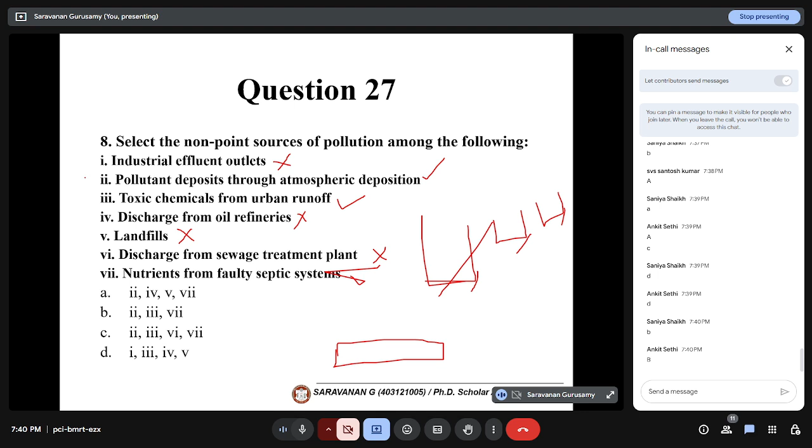Nutrients from faulty septic tanks - many households have septic tanks, but if you find some nutrients coming out, we don't know which septic tank it is coming from, because any septic tank may have a leak or a fault, it may have a crack. So that is a non-point source. So options 2, 3, and 7 are correct - option B is correct.

Discharging untreated wastewater into water bodies may have economic impact. We have three impacts, right? One is health impact, second is environmental/ecological impact, third is economical impact. So how does it affect the economy? Utilities spend higher budget for wastewater management - we need the higher budget, right, that is also correct. Negative effect on activities like aquaculture, agriculture, and tourism - that is also correct. If you have larger demand of water, then you will have larger production of wastewater, so it will again add cost in the wastewater treatment and management.

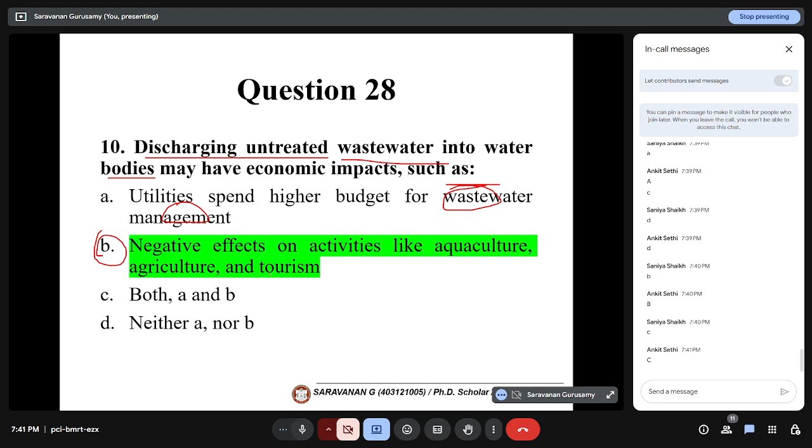Economic impacts on water bodies - discharging, oh I'm sorry, we have to read the question: discharging untreated wastewater into the water bodies. So here we are not talking about the wastewater management, we are talking about discharging and how it has impact. So if you discharge, it will have impact on aquaculture, agriculture and tourism - we don't talk about treatment as economic barrier. Sorry for that, option B is correct. It has a direct effect on agriculture, industry, fisheries, and aquaculture - it's not having any impact on the treatment facility. As the demand increases, we have an increasing cost in treatment, but that is on the management system, not on the untreated effluent discharge.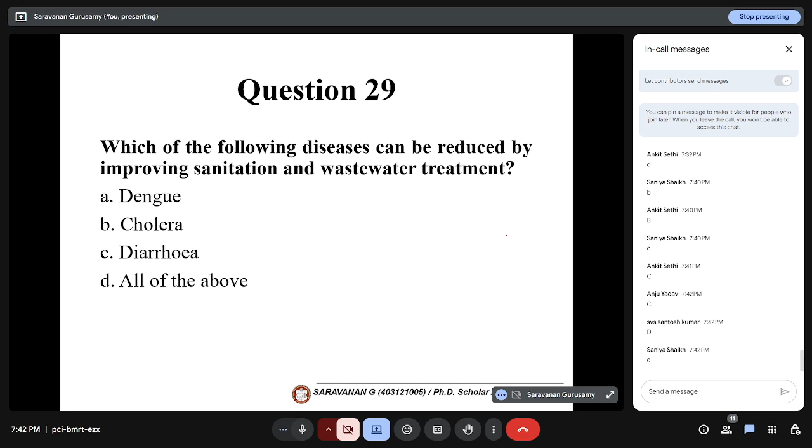Dengue is caused by mosquitoes from stagnant water. Cholera is from Vibrio cholerae, a bacterium also coming from water. All of the above, improving sanitation may eliminate many waterborne diseases like cholera, dengue, diarrhea, and helminths. So 'all of the above' is correct. Diarrhea is also a waterborne bacterial disease.

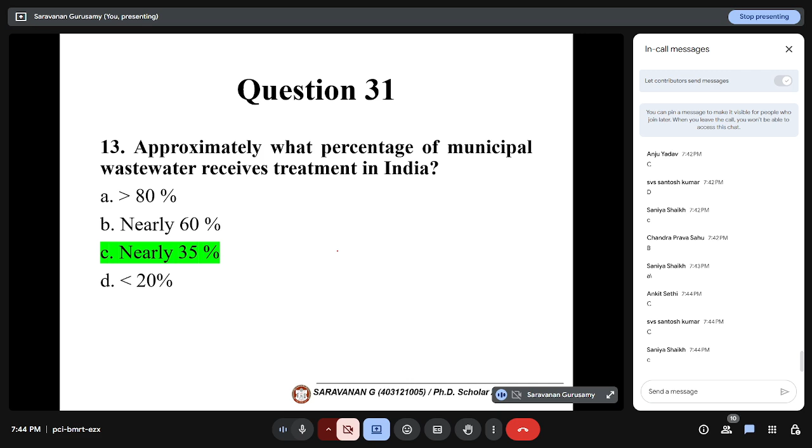Last question: approximately what percentage of municipal wastewater receives treatment in India? As of the latest data from 2018, nearly 70% is untreated and 30% is treated - so nearly 35% receives treatment in India, as we saw in the chart. For low and middle income countries, the range mentioned is 35%, 75%, 65%. We need to target treating at least 65% in low and middle income countries.